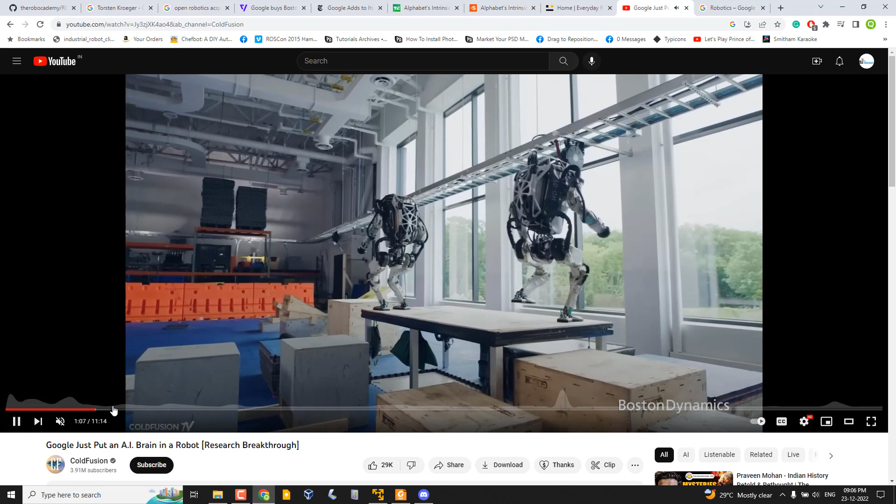Let me just check, yeah this one I guess is the most advanced. Maybe we can see this video. Let me check, yeah this is the robot.

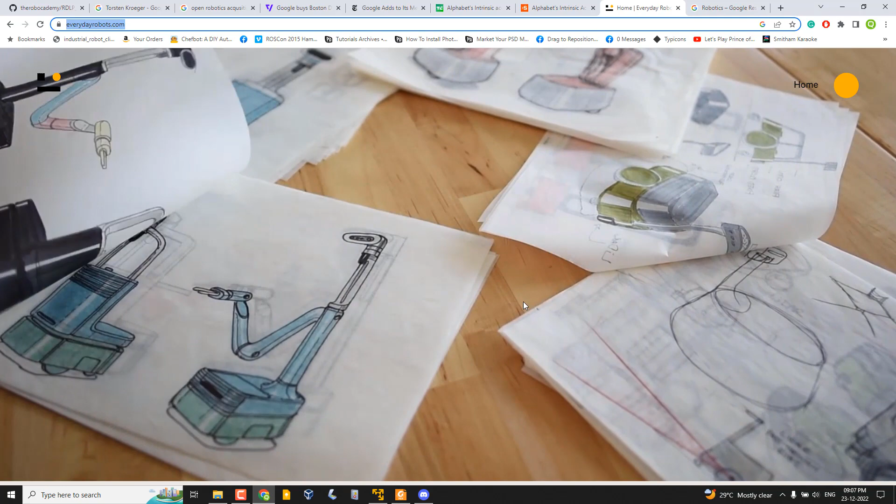I'm just showing that Google is working on robotics and they are interested in ROS, and some companies are still working while some got shut down. This robot, the Everyday Robot, is the product of one of the Google companies. And Intrinsic is another new company, they keep on changing the names. That's what's happening.

If you take Intrinsic, I think it started one or two years ago. This company actually acquired Open Robotics. The website isn't very descriptive, but from it we can see they're working on industrial robotics using ROS. You can see there's a UR5 robot with some gripper.

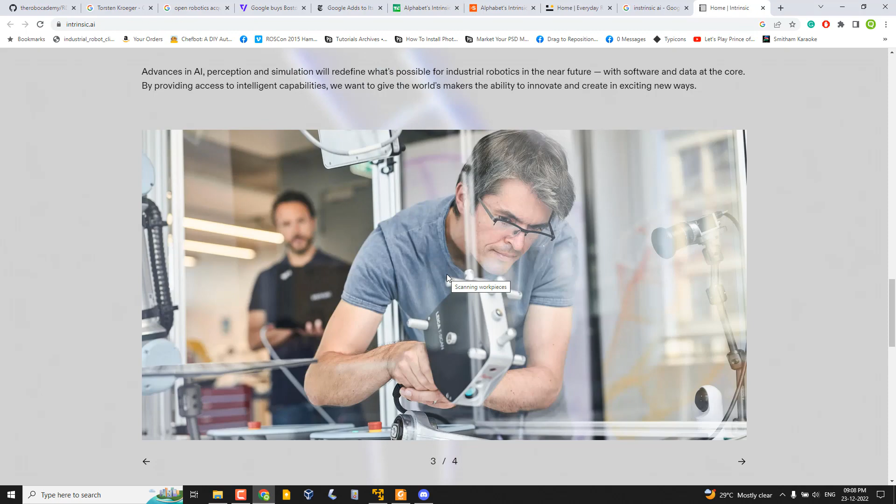What Intrinsic does is, I actually talked to the CTO and some people at Intrinsic, I have some connection there. They are working with industrial applications, industrial robotics applications, mainly using ROS. That's why, or that may be, the primary motivation for the acquisition of Open Robotics, they actually acquired major talents there, maybe for creating very good software for industrial robotics.

Okay, so this is what Intrinsic is doing. You may have some confusion about what happens to Open Robotics after the acquisition. What's happening is that ROS, Gazebo, and all this stuff are maintained by the foundation, a non-profit foundation. There's another team called OSRC, which is the commercial part of Open Robotics. I'm actually doing a project with OSRC now, OSRC Singapore, and they sold to Intrinsic. So that's what's happening.

But not the entire foundation, not the foundation. When I talked to Torsten, he mentioned the primary reason he called me was because I sent a message congratulating him after the acquisition. Then he asked about having a chat, and mentioned his primary motivation for calling or inviting me.

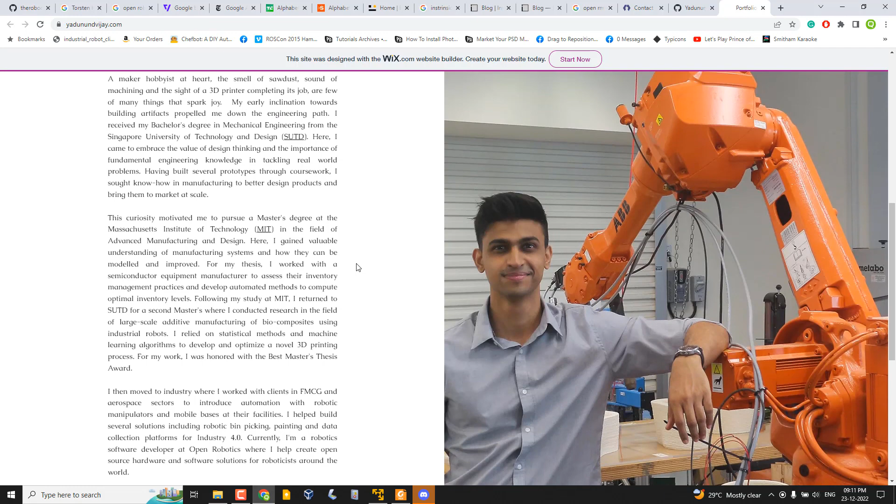I'm really appreciating his talent. He's got a bachelor's from Singapore University of Technology and a master's degree from MIT. So you can understand how good he is, very thorough with ROS 2. The current project is in ROS 2, and also OpenRMF. If you check the OpenRMF repository, you can find the main developer is actually Yadunund.

So that team got acquired, and the primary motivation is improving the software, industrial robotics software. These guys are very, very good. The OSRC team, if you check Open Robotics website, some of the people I know and work with, from my opinion, they are very, very good at this.

The three important projects from Open Robotics are ROS, Gazebo, and OpenRMF. Let me check the team. Yeah, so this is the team, but they didn't mention something, I think they've changed it. They are also mentoring GSOC. I think they've updated the website.

Currently, the foundation, they clearly mentioned, started OSRC in 2018 as a subsidiary of Open Robotics, and then in December 2022, the business OSRC Singapore was acquired by Intrinsic. OSRF operates under the Open Robotics brand to achieve the mission to support development. So OSRF is different, OSRC is different, just for clarification.

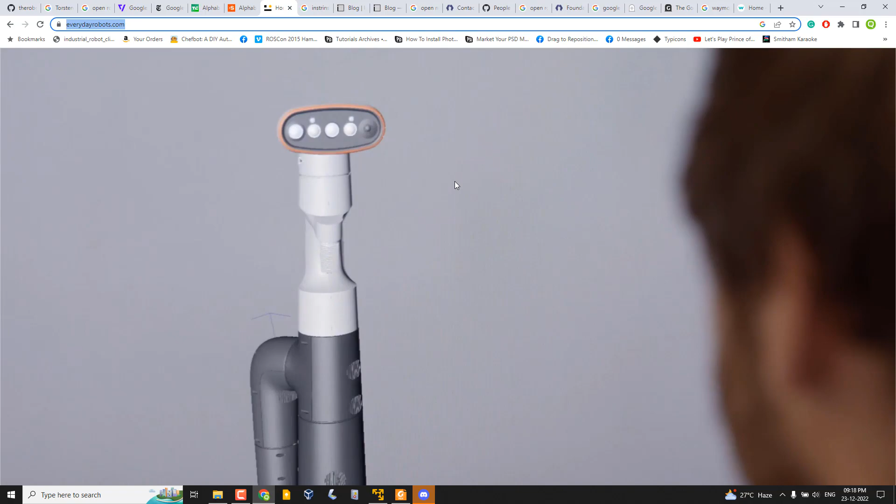They started Waymo, which is leading the self-driving cars company. Currently Waymo is not a part of Google, but an independent company. One of my friends is working there, so they're working hard to make fully autonomous cars. These are some of Google's products, and also Everyday Robots, but we don't know where it will reach. These companies are cool, even Intrinsic is cool, but the future is uncertain. Also, due to the recession and all, even Open Robotics is still struggling because their business model is somewhat complex.

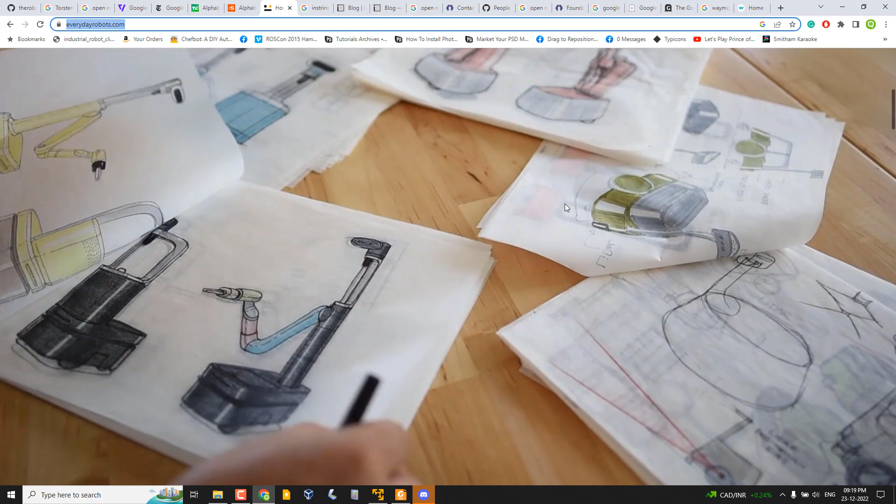That may be one of the reasons they thought about acquisition, because Open Robotics is mainly funded by grants and customer projects, like the ones I'm doing with OSRC. All these things create some income, but that's not enough to drive the big team they have, and they are also very expert in this domain. So the major part of Open Robotics' resources is now in Intrinsic, but the foundation will still be there, and the importance of ROS is actually going to double or triple.

That is what I am also thinking, so I am also positive. So why did he call me? Because of my books, because he thought I am actually an influencer, or someone important in the community. But currently I don't see myself as a very important guy, because yes, the books are there, but there are a lot of people who came to the community who are much more influential compared to me.

But still, from his perspective, maybe I am an influencer or something in this domain. What I see myself as is that I started my career mainly in ROS in 2010. So because of my experience and contacts, maybe he called me, and he's calling some other people in the community too, to understand the vibe of the community, like what people are thinking about this acquisition, and how we can improve the community.

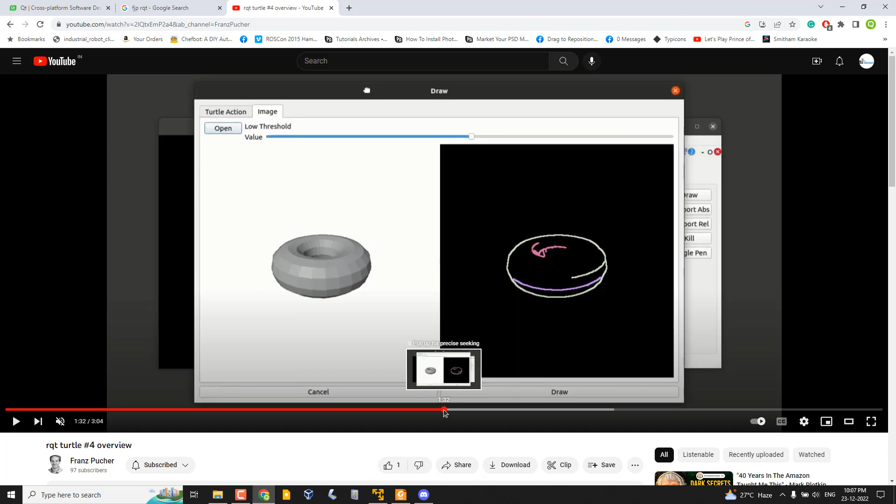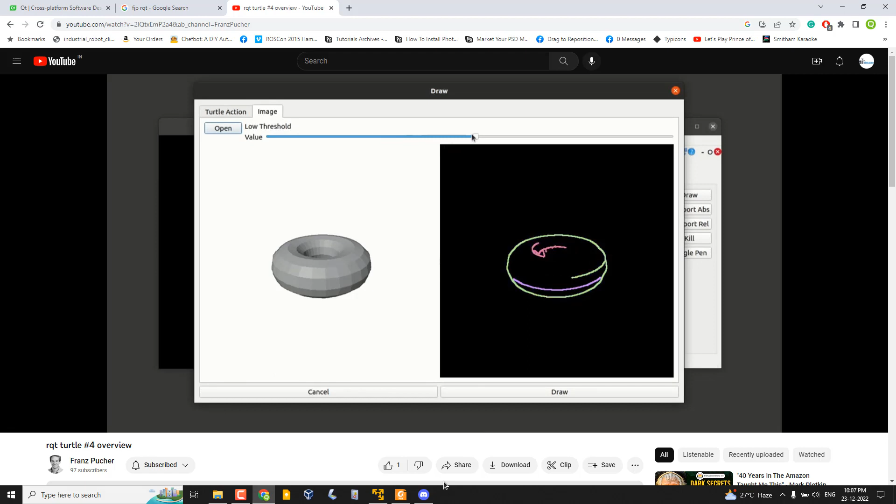Using the simple plugin, we can manage all the stuff like the color. There's a thing called draw. So if you open an image, it will appear in the window, and then we can threshold it. If you press the draw button, it will start drawing. The turtle seems to start drawing.

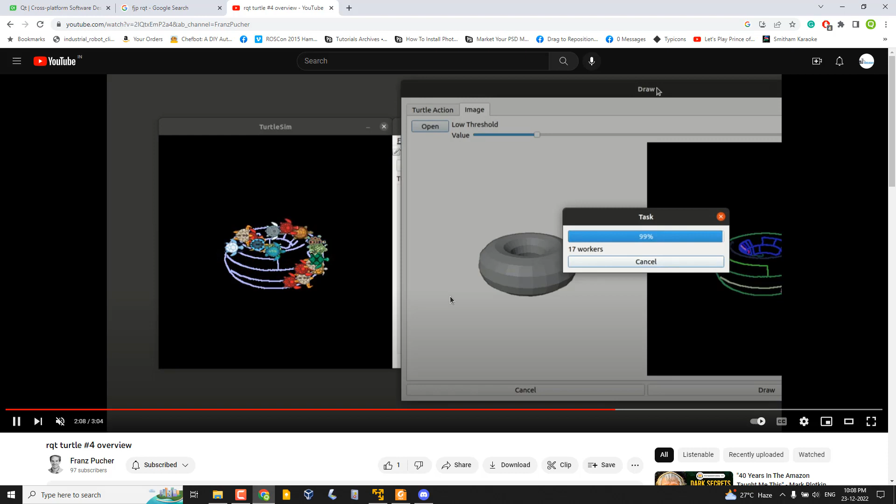It's interesting, right? These are all cool projects that I'm talking about. A group of turtles is working on drawing that thing. If you think about whether there's any application for that, there isn't, but it's showing our capability, right?

So this is one example, guys. You can take a look, and we will be discussing the RQT plugins tomorrow, and RViz as well.